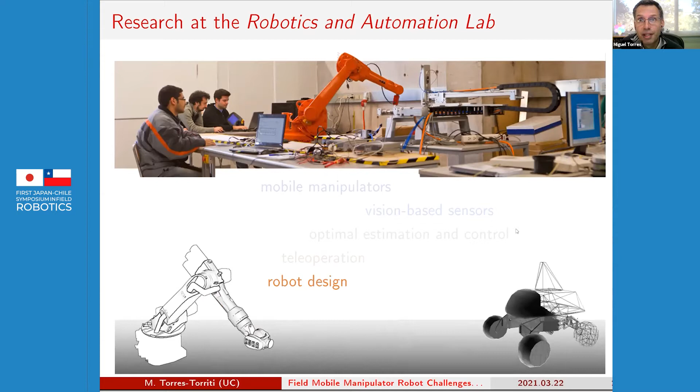Currently, our research is focusing more on the dynamics and motion control of mobile manipulators with applications to fruit harvesting and weed removal, and also the design of operational space controllers combined with deep learning for manipulation and mobile manipulation tasks. So why mobile manipulation?

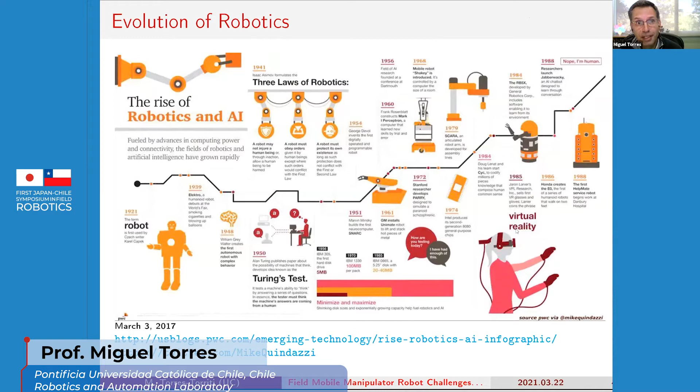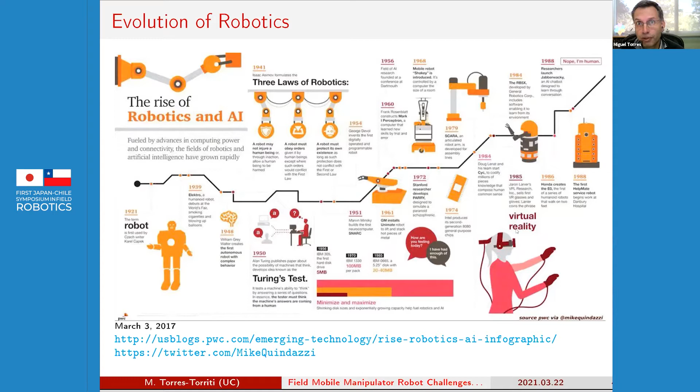I think it's the next step, because if you consider the evolution of robotics — this is a chart published by PricewaterhouseCoopers a few years ago in 2017 showing the evolution of robotics — you can see that in the 70s and 80s most research focused on robotic arms. Then in the 90s and early 2000s, the focus shifted to mobile robots, so now we have vacuum cleaners and semi-autonomous cars that have reached the market.

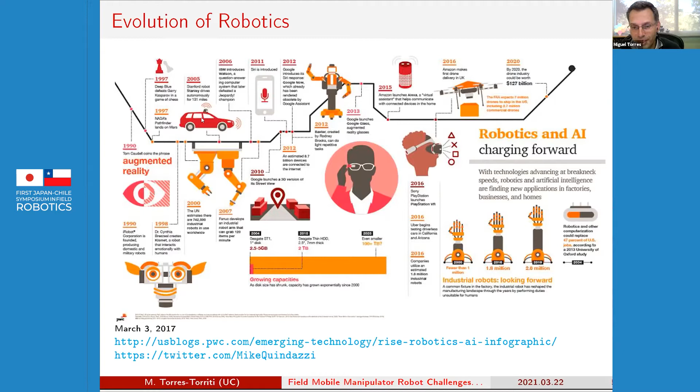The next step is to have platforms that can move but also interact with objects. We're still working on that. Even humanoids, which are very expensive robots, are far from being applicable commercially in the short term. So we are looking to combine the advantages an arm gives you with the mobility of the base to solve concrete problems relevant to our local reality.

Agriculture and mining are two very important industries here in Chile. So a few years ago we wanted to build a robot that could harvest, especially table grapes and some wine grapes.

There are some harvesting machines for wine grapes that beat the plant, and it doesn't matter because the grapes will then be squeezed and turned into juice. But if you want premium quality wines or table grapes, you cannot beat the plant — you have to pick the fruits by hand.

But there, as was mentioned by Professor Noguchi, there's a shortage of labor, costs are rising, and people don't want to work in the fields anymore. It's tedious, repetitive, and also harder compared to indoor robotics.

So we wanted to build these robots to harvest, and the first problem is: where exactly is the fruit? We started working on grape bunch detection, and did a work showing high rates of success and accuracy in detection, which was published in Computers and Electronics in Agriculture.

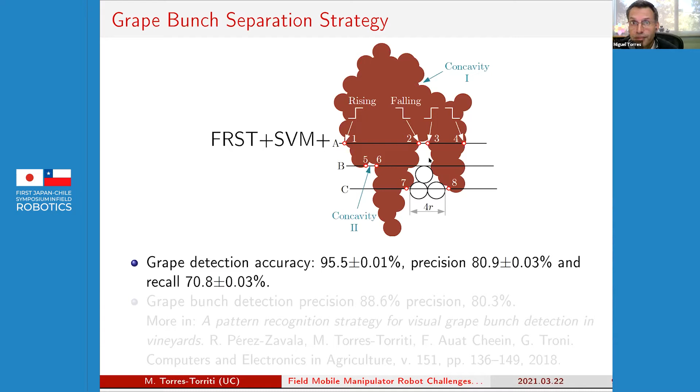Our detection accuracy was above 95.5%, depending also on the variety, because sometimes white grapes are harder to detect since they have smaller contrast with respect to leaves. So this was, in part, a starting point to work on mobile applications that have to interact with objects.

This is an example of a problem posed to us a few years ago: the national airline company wanted to repaint airplanes, which requires sanding the entire airplane. They wanted to use robots, but concluded that regular robotic arms used in factories don't have the reach necessary to cover large surfaces, so they need a mobile base.

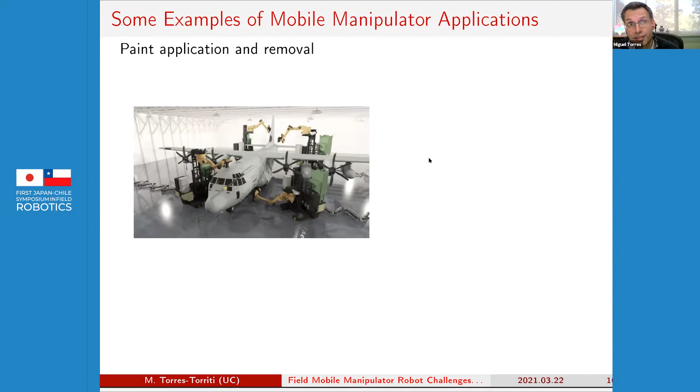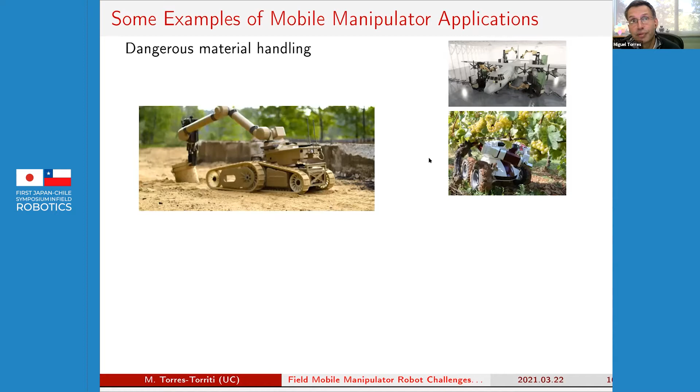As I was mentioning, in agriculture — not only for inspection but also for handling fruits or handling dangerous materials — and in indoor applications there are many possibilities for mobile manipulators, as well as in mining and agricultural situations. Not only because you want to automate the process, but also because you want to reduce energy consumption.

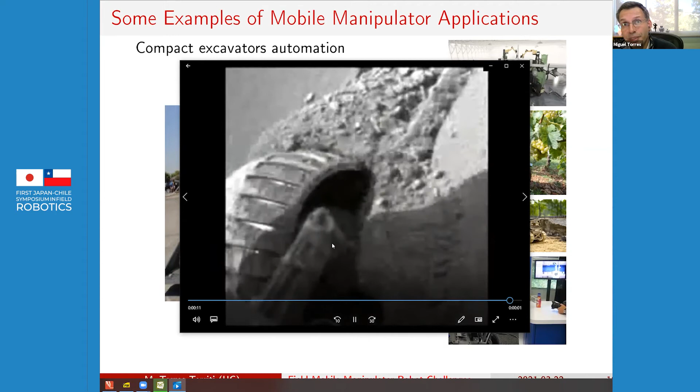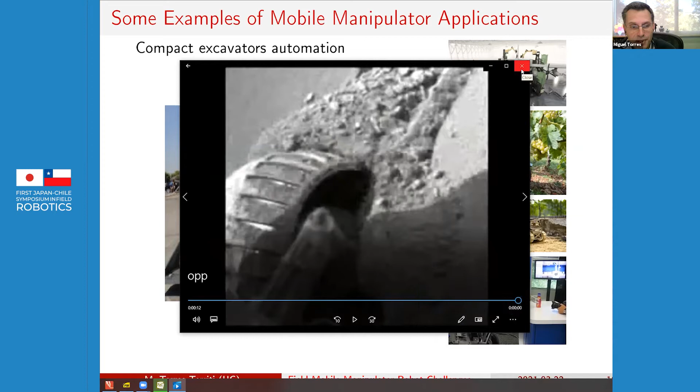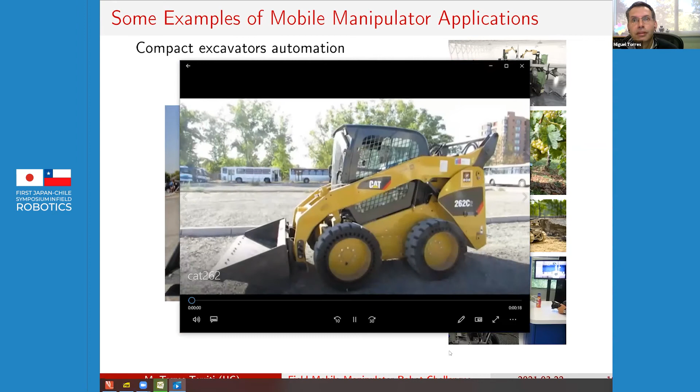In this video, of the Opportunity rover on Mars, you can see that the robot is slipping, meaning there is energy consumption that is not producing adequate translational motion. The same thing happens with machines in the field. I'll show you another video of our experiments — this is our machine.

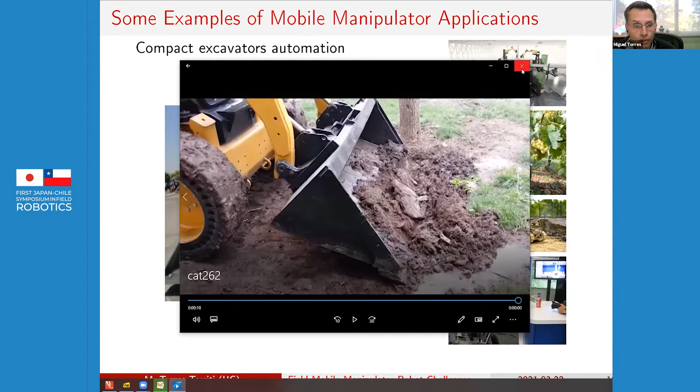And you can see there that the wheel is slipping, and that's fuel that is consumed doing nothing, basically. Part of our work was to detect those situations when the robot is trying to pick up soil or material. So the first part was to develop very physically accurate models that could allow us to simulate and replicate what was happening in the field.

And by very accurate, I mean that even the wheel-ground interaction had to be modeled, because the wheel-ground interaction propagates forces to the arm that have to be compensated if one wants to keep the arm stable. Or you can have situations in which some of the wheels are not touching the ground because of the unevenness of the terrain, so you have skidding.

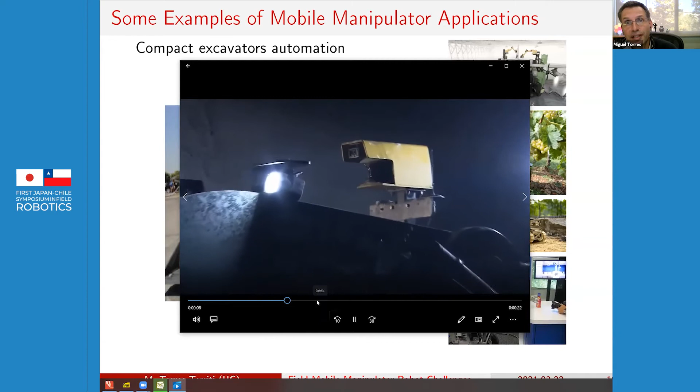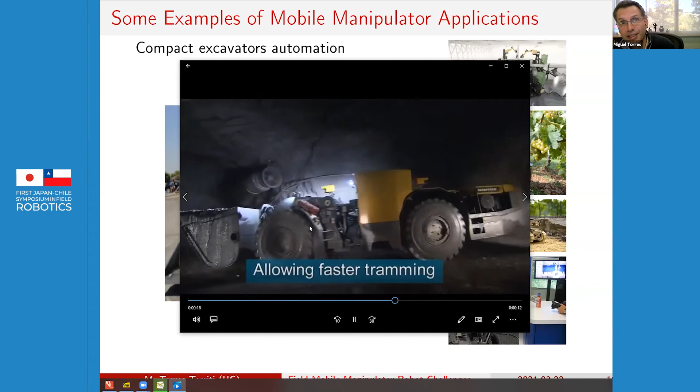And concerning the perturbations, you can see here that these machines that are semi-autonomous, they are teleoperated, are sometimes dropping material. The objective is to maximize the load, so the operator will try to fill the bucket to its maximum capacity, but as it moves and vibrates, it loses material. So part of our work was to decouple the motion of the arm and

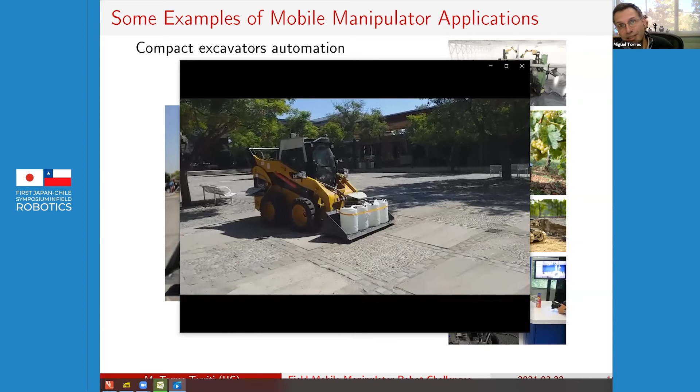have the arm as stable as possible. Also part of our objective was to estimate online the parameters, the inertial parameters of the machine, because in that way we can measure the transported load or even the friction in the wheel axles, which give us some information about the wear of the machine.

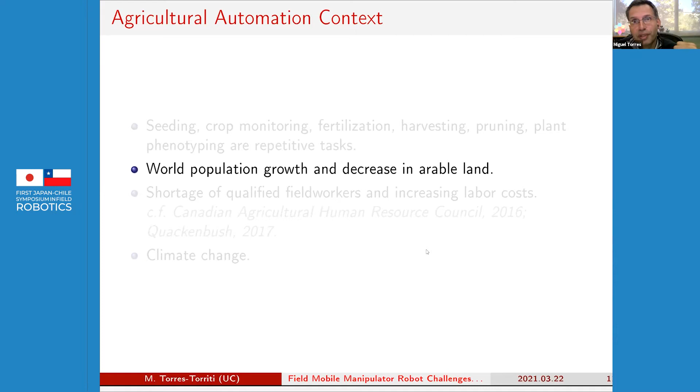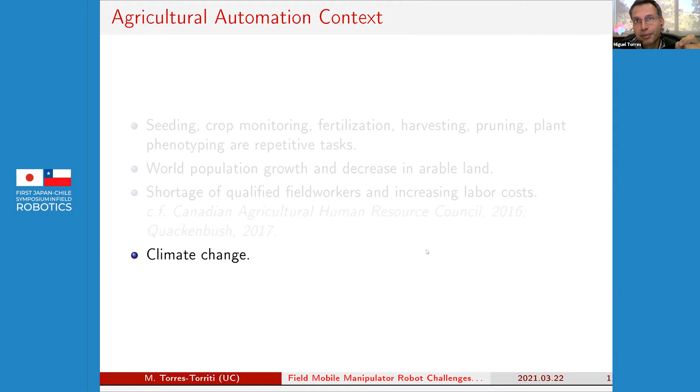So there are a lot of technical details, and we will not have the time to go into the details. But as I was mentioning, there are different applications in agriculture for monitoring fertilization, phenotyping. There is an increase in world population and also a decrease in arable land, and also a lack or shortage of field workers. And climate change is another important factor for introducing more automation into agriculture and being more efficient in the use of resources.

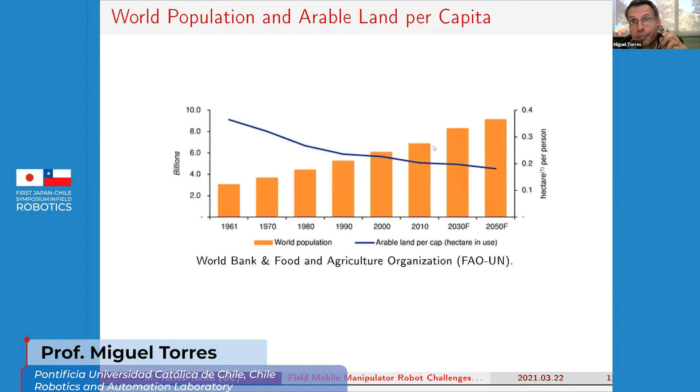So in this graph, we have this blue line, which represents the arable land per capita. It has been decreasing almost by 50% since the 60s. So now per person, less than 0.2 hectares are being used to produce what we consume. On the other hand, the population has been increasing, but now we are around 7 billion people, and it's expected to continue to grow to 9 billion by 2050.

So, as I was mentioning, this scenario may seem a little bit pessimistic, but on the other hand, if one thinks that the land that we are using to produce what we demand has decreased, and we are still able to satisfy the demand, that means that it's the introduction of phytosanitary products, fertilizers, and different agrochemicals, and the use of technologies that have allowed this increase in efficiency. But there is room still for higher efficiency.

This graph shows different fruits and the production, the value of the production at the aggregated world level. And we can see that grapes is a very high value crop, and that's one of the reasons why we were focusing on grapes.

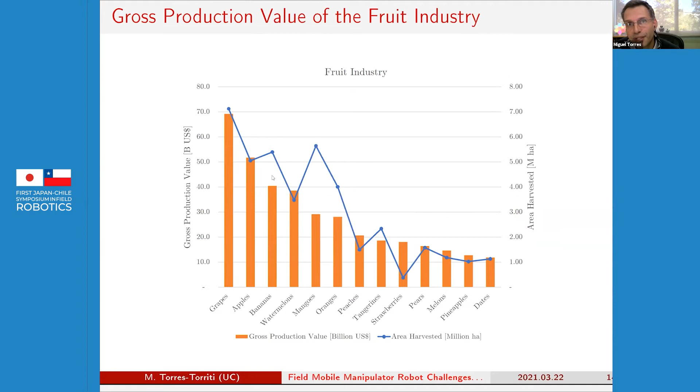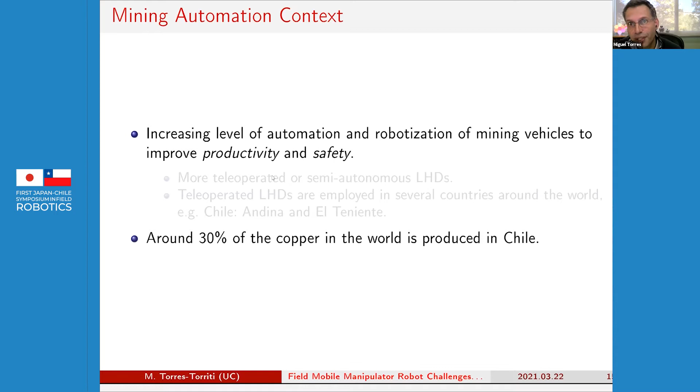And then in the context of mining, there are other aspects which are related to safety and also productivity. And also in Chile, we have 30% of the copper that is produced in the world. So in both cases, both in agriculture and mining, there is an objective, an economical objective, which is to increase yield and efficiency.

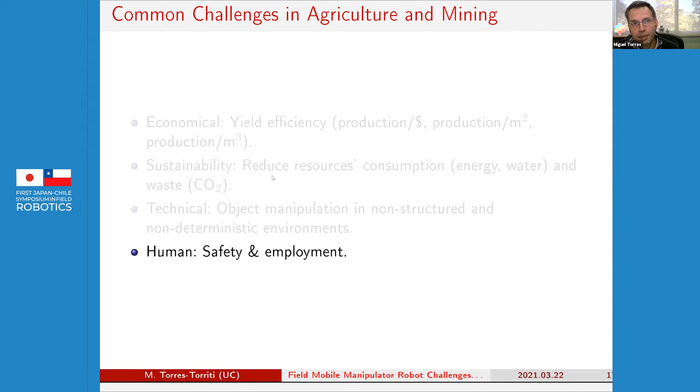Sustainability objectives related to reducing water consumption and the CO2 footprint, and also technical objectives which are related to how do we manipulate things in environments that are not structured and that are less deterministic than indoor environments, and also aspects related to safety. So, concerning efficiency, one of the first things that we wanted to do was how do we estimate the mass that is being carried?

And one could think the problem in simple terms as a problem of, well, let's measure the force or the traction force and divide it by the acceleration, and we have the mass. Obviously, the problem is a lot more difficult because the machine is not moving in a line. It has a pretty 3D motion. There is noise in the sensors, and sometimes the acceleration will be very small, especially when it's starting. So we cannot divide F by A in such a simple way.

But one can implement different strategies, filters, to estimate the mass and other dynamic parameters in an accurate way.

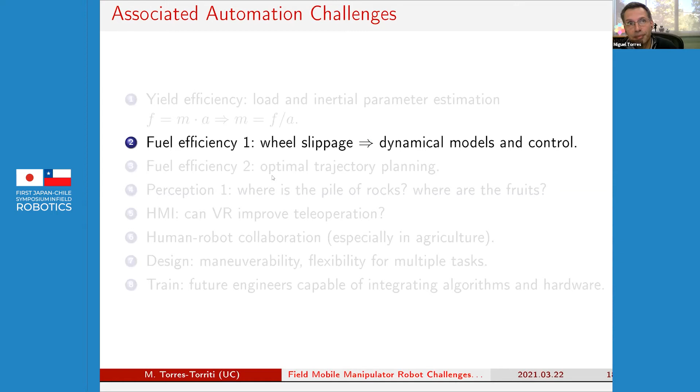Once we have the mass, we can work on improving the fuel efficiency and reducing the wheel slippage, and also finding optimal trajectories that minimize energy consumption. This isn't only about finding the smallest distance, but especially in agricultural fields where you can have mud, there are areas one could avoid if you know the terramechanical parameters, traction characteristics of the terrain, and the slope.

So that was also part of our work, along with perception and how we improve teleoperation using virtual reality, etc. This part of the research is also important because one needs to improve maneuverability and also train future engineers capable of developing new algorithms and integrating this new technology.

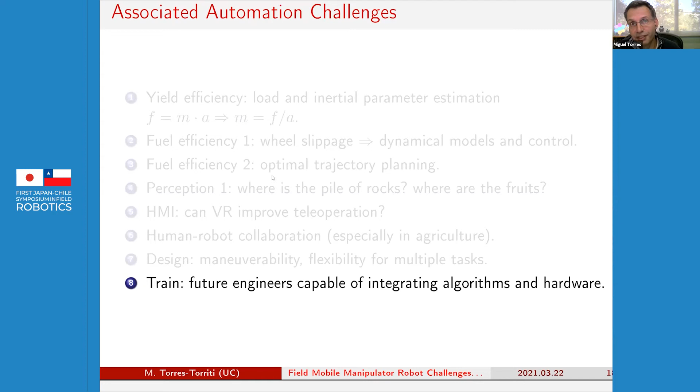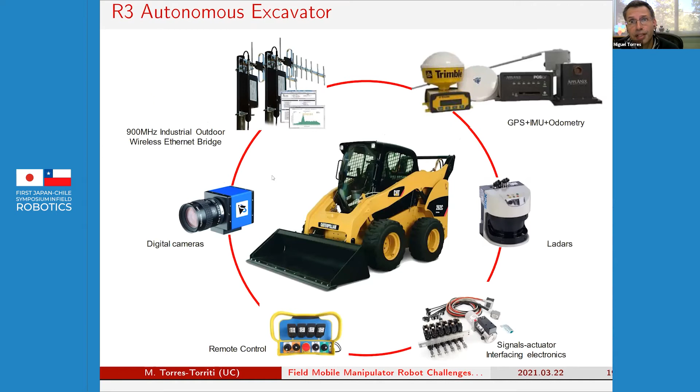And this is a summary of our platform. We have integrated ladars, the teleoperation system, the GPS, and inertial measurement units that we developed in our lab.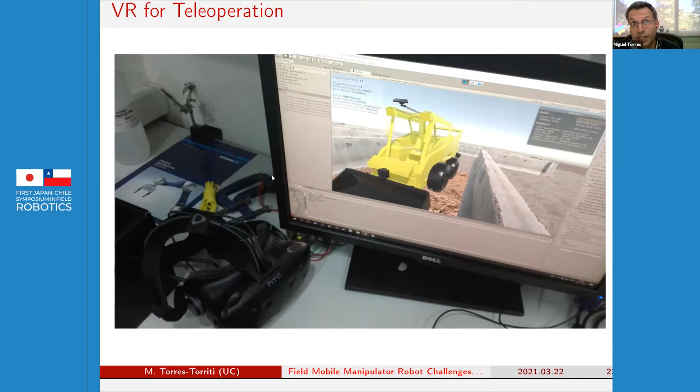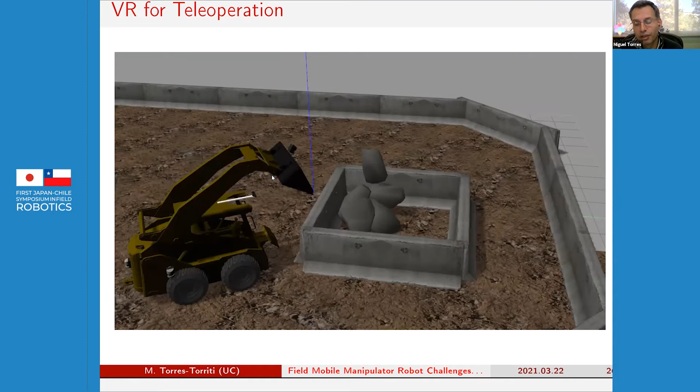In 2014, we started with virtual reality teleoperation tests to see if we could improve teleoperation with respect to the traditional way of looking at a 2D screen. So we developed a replica of the environment, which we can see from a third-person point of view, and compared how difficult it was to move the machine compared to the traditional 2D view.

Then we installed torque sensors in the wheels and developed optimal path planning strategies, considering the forces and the energy being consumed. I'll show a small video.

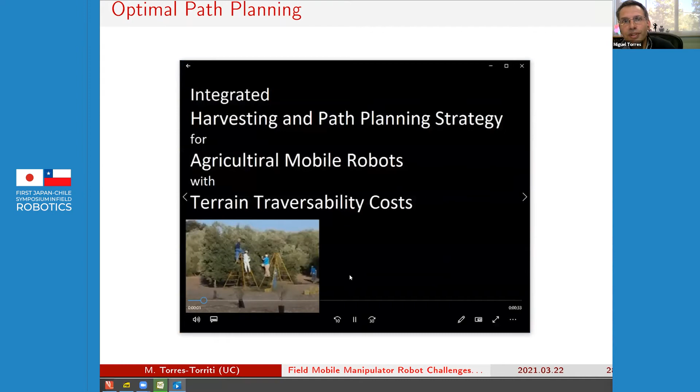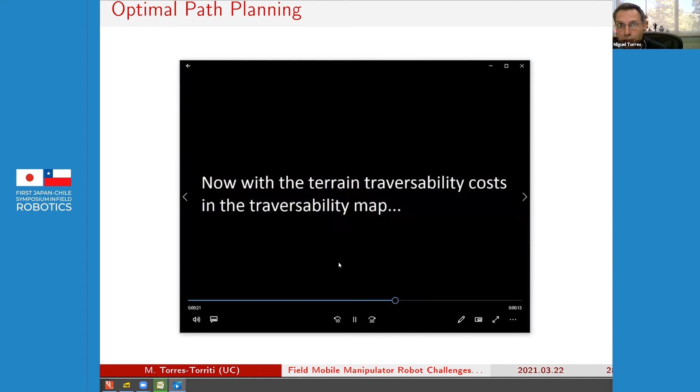So the strategy is how do we optimally harvest fruits depending on the maturity of the fruit and also the traversability costs of the terrain. We were employing rapidly-exploring random trees to develop an initial route, but also considering the mechanical aspects you saw in this image, where certain darker blue areas have a higher traversing cost. So in the end, the optimal route, or the robot, is rerouted through the blue line.

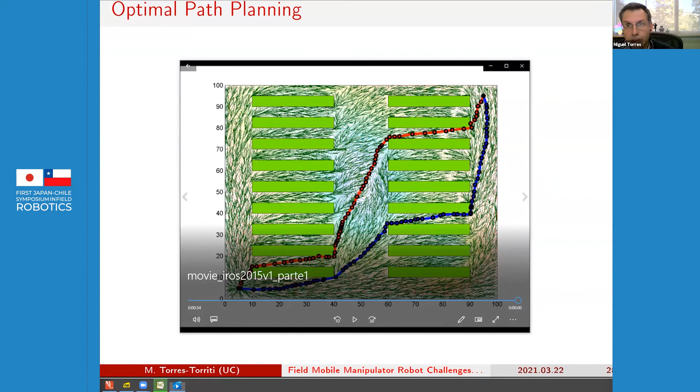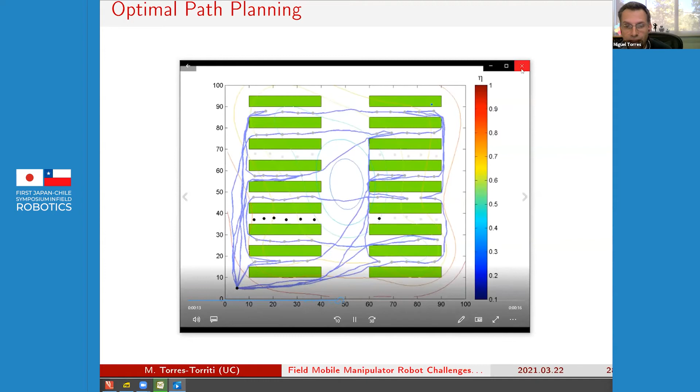I can show you some other videos of how the process works. If there are different points defined by the user that have to be harvested, the robot picks the optimal routes, minimizing its energy consumption. If there are more points, the robot adds those points to its harvesting plan and optimizes the route. I'll show next.

I already showed the videos that were supposed to go here, but I had some problems with an update of the Flash player and my presentation software. So unfortunately I could not have those embedded, but I already showed those videos.

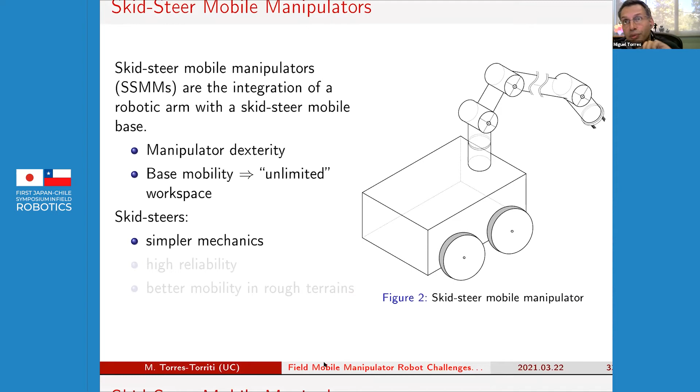Part of the challenge was, as I was mentioning, to develop this accurate model in which the forces of the terrain-wheel interaction would be propagated to the arm. This was done using the spatial vector algebra formalism.

The acceleration of the base is actually a 6-dimensional vector, with 3 translational components and 3 rotational components. These inertia matrices are 6x6 matrices, and these force vectors are also 6-dimensional vectors. So the notation is very compact; it resembles the scalar representation.

One advantage of using the spatial vector algebra formalism is that it simplifies the way one can introduce these external forces. This is probably the main difference with respect to traditional models found in robotics textbooks, where it's usually assumed that the floor is flat, so there are no forces being propagated to the arm.

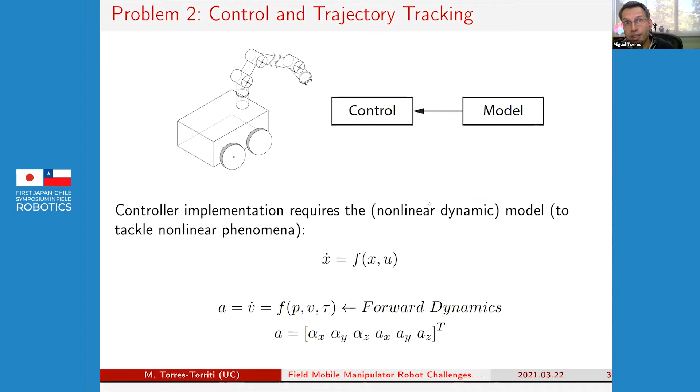This was important, as I was mentioning, to optimize the path of the robot, because if you want to optimize the path from an energy point of view, you need to know the dynamics. The kinematics alone is not enough.

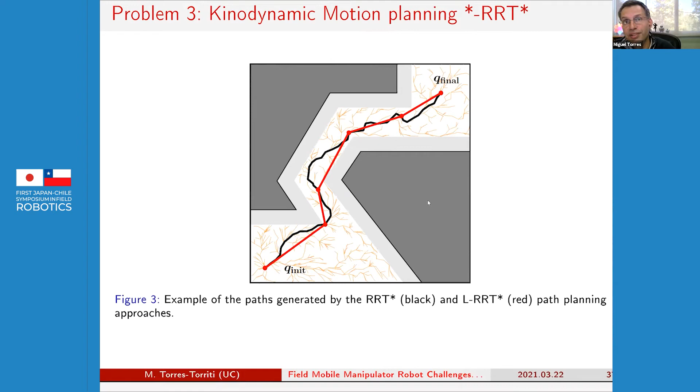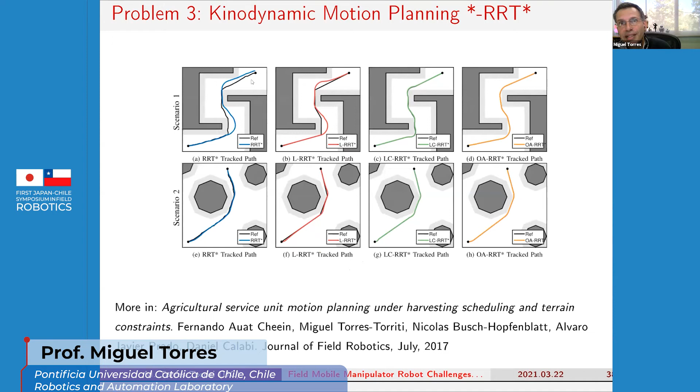This is how this kinodynamic motion planning would work. We would start with a graphical path, which does not consider the dynamics, but then on top of that path we have to refine it considering the dynamics. So when you consider the dynamics, you can see that the blue line does not follow exactly the black line that was found just by polygonal approximation.

So on the right graphs, for different situations—one in which there is a tight tunnel or passage, or in the lower right image where you have different possibilities to reach from one point to the other, because there are two possible paths—the system not only minimizes the distance, but also smoothens the path, considering what the machine can actually do in terms of its turning radius, accelerations, limits, etc. So these are some of the aspects concerning the strategy.

So instead of just joining points with straight lines as different only kinematic-based algorithms do, in this one, when the system approaches one waypoint in the trajectory, it starts finding a smooth arc or trajectory that connects the points. And there is a radius parameter for this that minimizes the energy and smoothens the path.

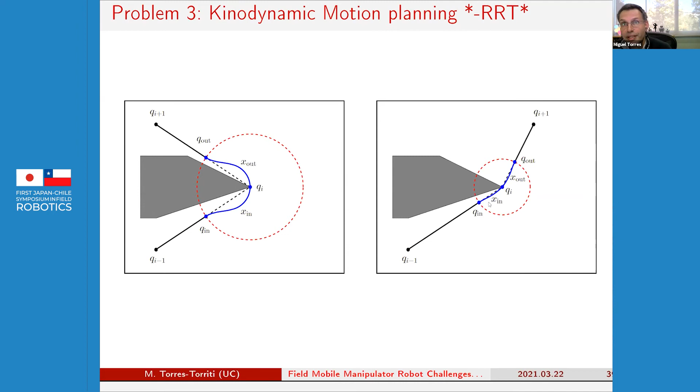So concerning the wheel-ground interaction, obviously we had to model also the motion of the arm, considering the hydraulic actuators. One of the lessons we learned is that because of the response time of the actuators, it's not so simple to cancel high frequency disturbances.

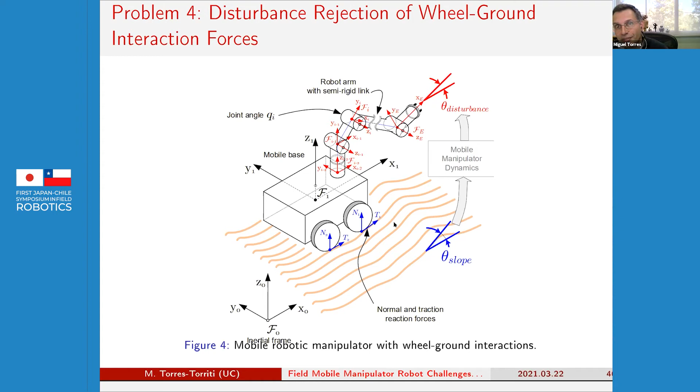So future machines that want to cancel those disturbances will have to have different actuators or a separate power plant, because in the case of our machine, the engine is driving a hydrostatic pump that feeds the wheels and also the arm. So part of the power of this pump is being consumed by the wheels. And when you want to compensate the arm, the wheels are sometimes absorbing the hydraulic energy, and you cannot respond fast enough in some situations.

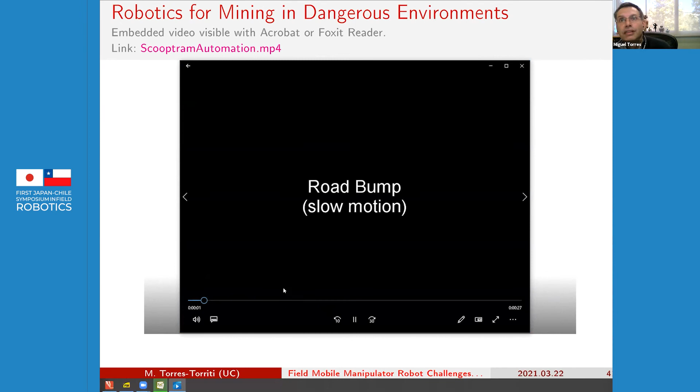I'll show you a video. This is in slow motion, but what we were doing with H-infinity control techniques was to cancel the disturbance of this bump.

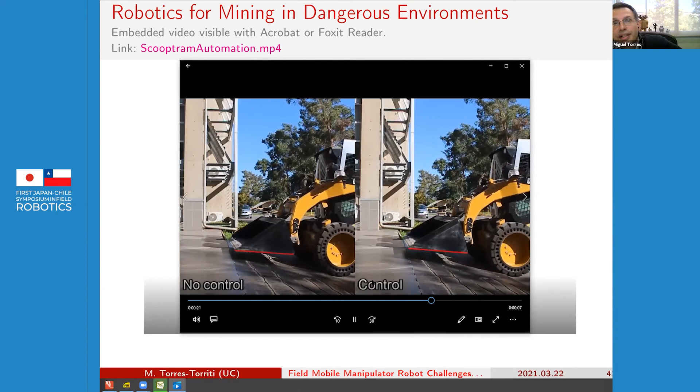And also in the case of ramps, we could compensate the change in slope, keeping the bucket level.

So in order to achieve this, our strategy had a part in the controller which would use the H-infinity tuned control with also a feed-forward component. And the feed-forward component can be obtained either from the inclination sensors, or if one has a LiDAR, one can look at the terrain ahead and see if there is a change in slope and start feed-forwarding this disturbance.

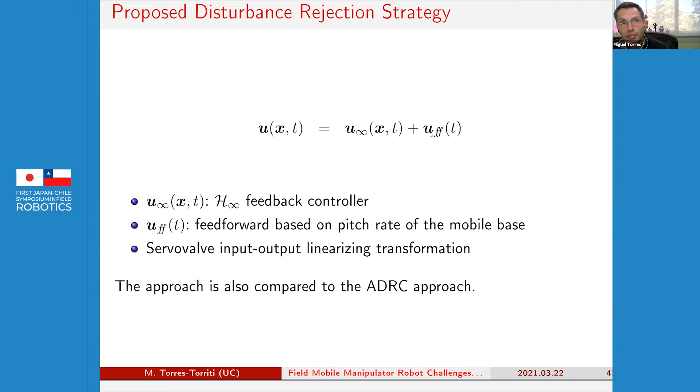I will not, because of time, go into the mathematical details of the H-infinity controller formulation, but just show that without any control, you see the orange line. This is a change in the slope of the terrain of 5 degrees.

And with a PID controller, one can compensate a little bit the disturbance, shown with this pink or magenta line. But if one uses the H-infinity controller with feed forward, shown in the graph on the right, it practically cancels the disturbance. With the H-infinity controller without the feed forward, the controller responds, but there is a period in which the disturbance is not fully cancelled.

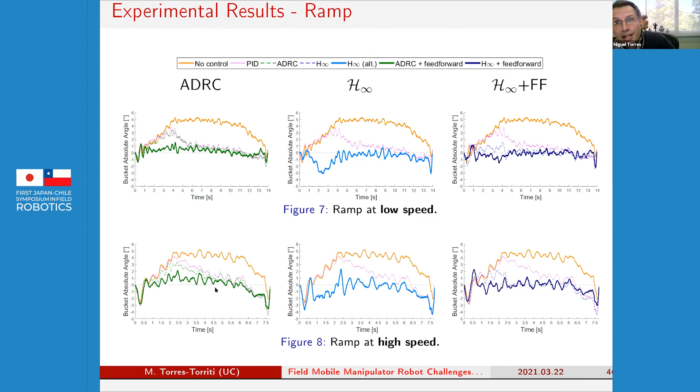And in the left graph, we also tried the active disturbance rejection control strategy, which has become popular recently. It also does well at low frequency or low speeds, but at higher speeds, the H-infinity controller is slightly better.

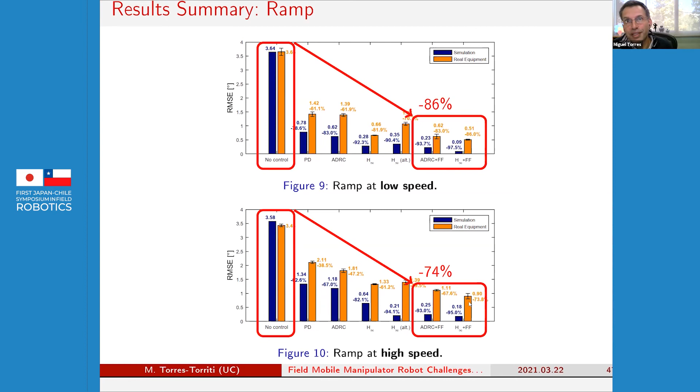So we were able to achieve significant reductions of about 80%, 86% in the disturbance at low speeds, and not so much at higher speeds for the case of the ramp. The bumps are more difficult because they produce high frequency vibrations, but we were also able to reduce the disturbances by at least 24%. With this, what we are seeking in the end is to minimize the loss of material that falls from the bucket.

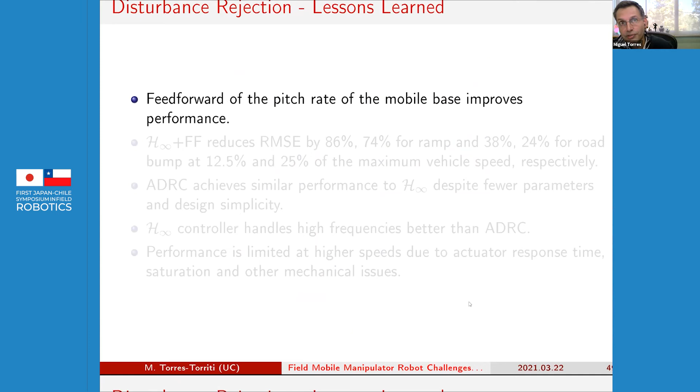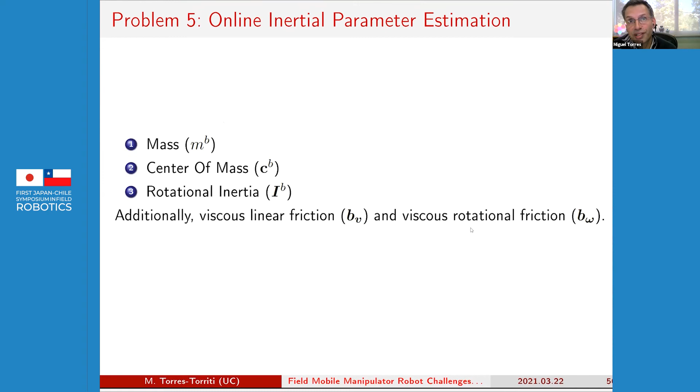So I already mentioned these results, and the last problem was one of the problems that I mentioned first, which is how much mass are we transporting, and also where is the center of mass, and what is the rotational inertia, and additionally the viscous friction parameters. And why is this important?

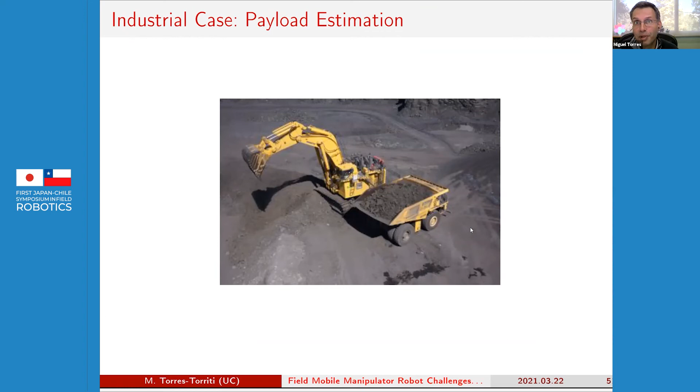Because when you are trying to manage your operation, you want to know if you really have moved the amount of material that you think you have moved. So even if there are some industrial scales that can be placed, these are expensive. They need continuous recalibration because they use strain gauges, and they do not give you information about viscous friction.

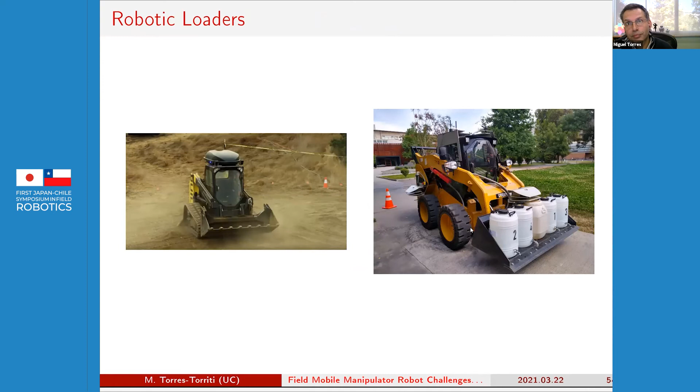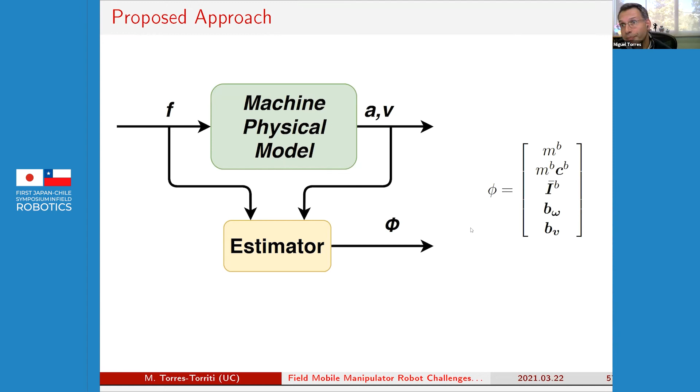So once we have the model, we can formulate a physical model that takes as input the force that we can measure and the resulting acceleration and velocities, and using that information, estimate the vector of parameters, which are the mass, the location of the center of mass, the inertia matrix, and the main viscous frictions.

As I was mentioning, we are using this spatial vector algebra formalism. So our velocity vector is actually a 6-dimensional vector that has the rotational component, the 3D rotational component, and the 3D translational component. The same thing for the acceleration.

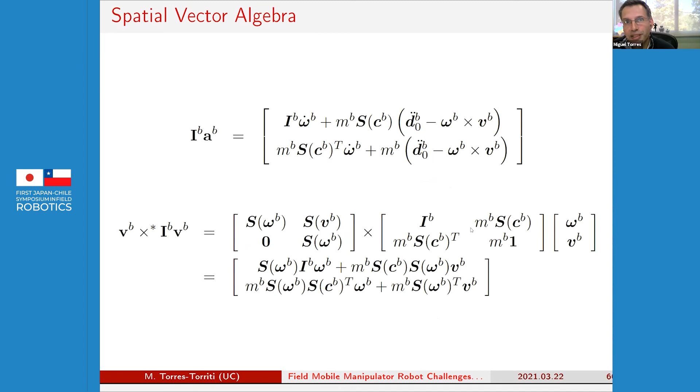Then one can formulate the equations of motion for the base, and rearranging the terms. This looks a little bit ugly, but after doing the math, one can establish an equation in which the force vector is equal to this thing on the right side, which has the angular accelerations and angular velocities. And in the end, the problem can be separated as a linear problem with respect to the parameters.

So one could use ordinary least squares to estimate the parameters if one measures the accelerations and velocities. The question was, can we do better than just using ordinary least squares and doing batch estimations?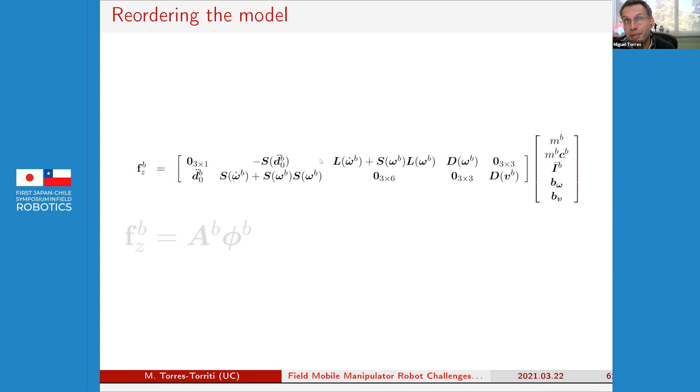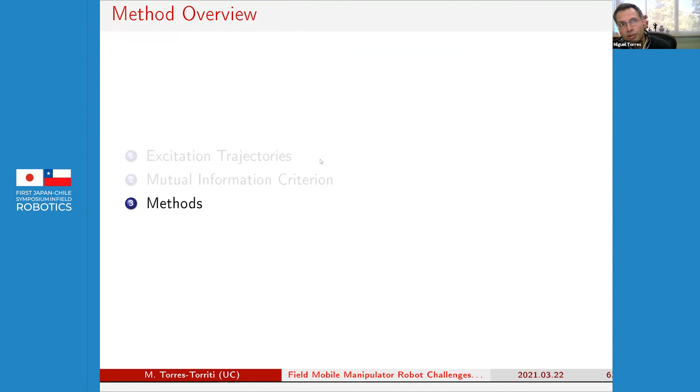So we implemented an extended Kalman filter, and we also introduced something which we call the mutual information criterion, which basically tells us if there is any relation between the acceleration that we are observing and the force that we are applying, because we know due to the physics that there is a dependence. So they are not independent variables. Using this mutual information criterion, we were able to measure this degree of dependence.

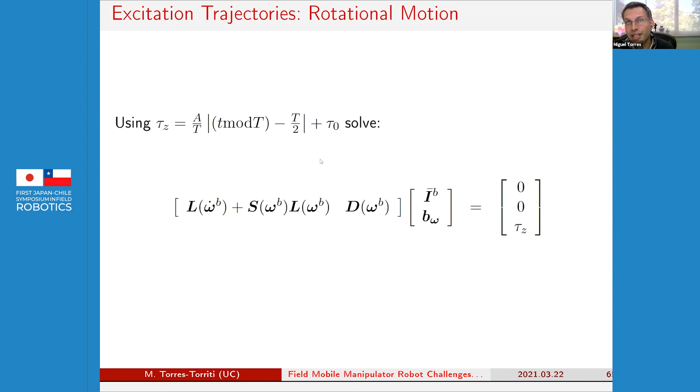And when we detect that the measured acceleration and the force are sort of independent because the level of noise in either of the two is too high, we discard those measurements from the estimation process. In that way, we improved the estimates because we're ignoring measurements that we could say are bad or noisy.

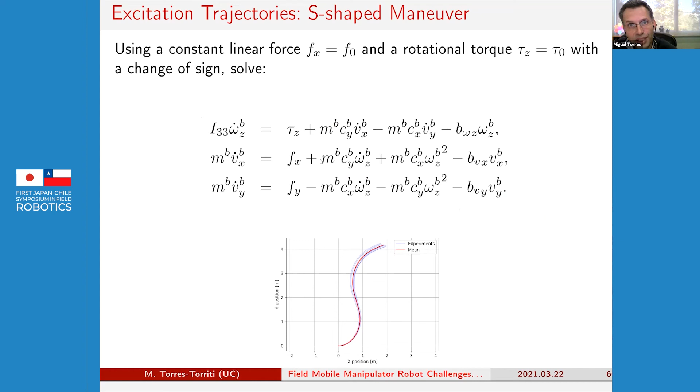So just to finish with this presentation, we developed different excitation trajectories: straight lines, rotations in place, or S-shaped maneuvers. These are the formulas for the mutual information criterion.

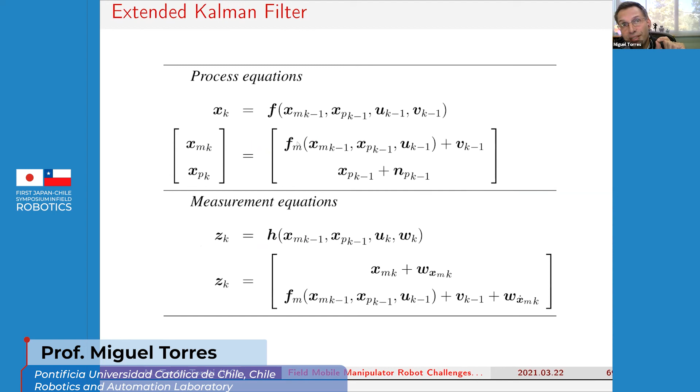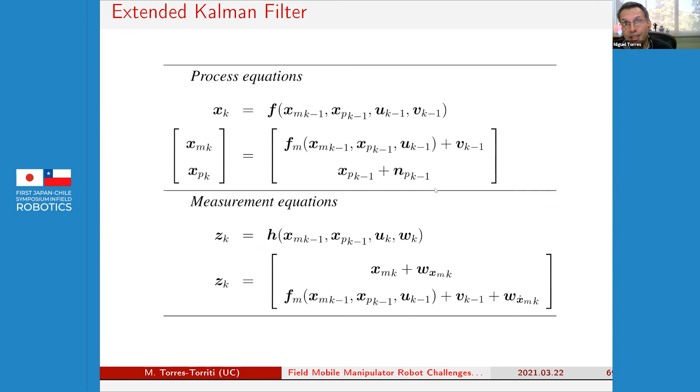And also an extended Kalman filter in which the filter was extended with a vector of parameters. So the first part of this equation, the process equation, is the motion dynamics, which we already saw. And the second part, this x sub p, contains the vector of parameters. We model that as part of the process dynamics, so the parameters are not constant, especially the mass and the center of mass.

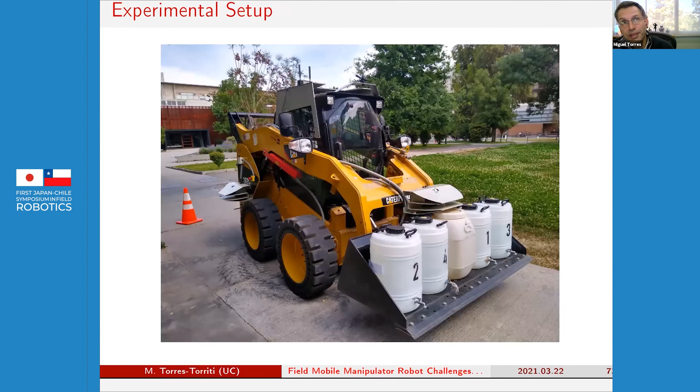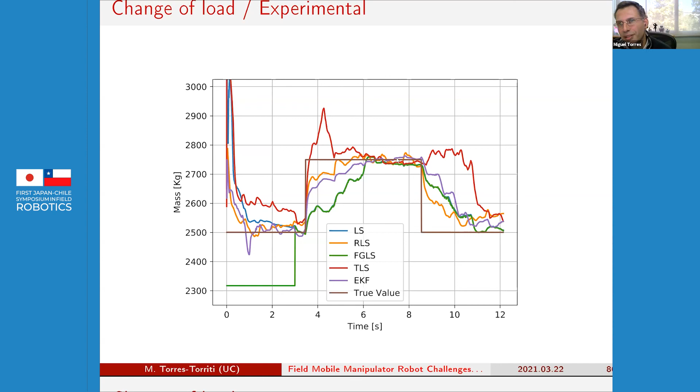Both in simulation and in the experiments, we were able to have converging estimates in the first place, which was something important. The worst one was the total least squares. The extended Kalman filter and the recursive least squares were the best ones for estimating changes in the load.

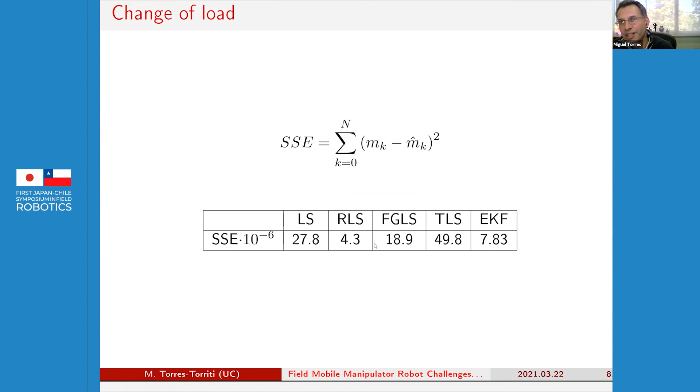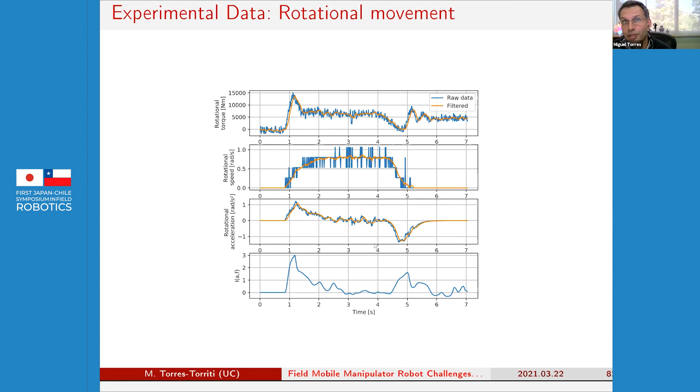In this case, the recursive least squares looks a little bit better. But if one compares the case of estimating the rotational inertia, the extended Kalman filter was better. So in the end, considering the different parameters that one wants to estimate, the overall error of the extended Kalman filter was a little bit smaller than what we could achieve with the recursive least squares.

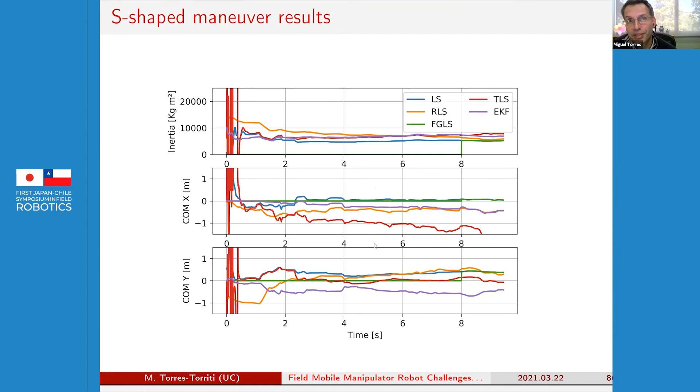So this is part of what we learned and developed for parameter estimations. The problem with total least squares is that it diverges when we wanted to estimate, for example, the location of the center of mass. So that was probably the worst approach.

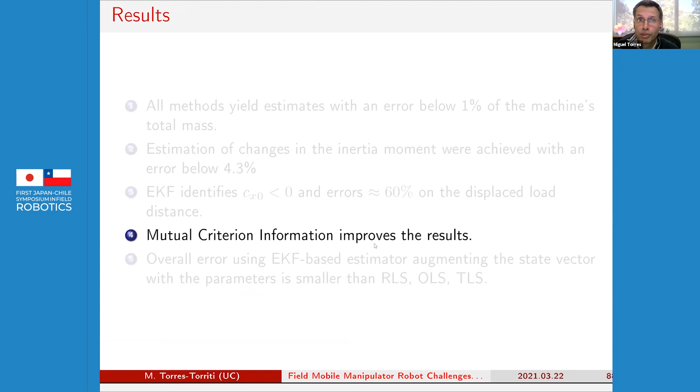We can estimate the weight of the machine with errors that are below 1% of the total mass of the machine. And also the rotational inertia parameters with errors that are below 4.3%. Estimating the center of mass is a little bit more difficult because of the skidding of the machine. The mutual information criterion was very important, and I already mentioned that the extended Kalman filter was slightly better than the other approaches. So thank you very much.